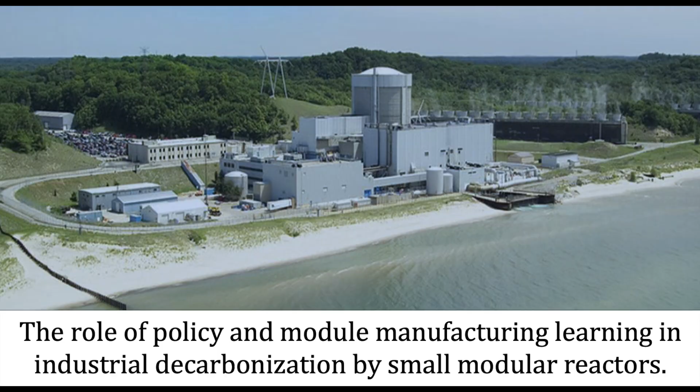You all see the news stories, you all see the day-to-day of working at a power plant or working with, or knowing people who have worked here. So I'm going to try to give the overarching content around the nuclear industry and the history of it and the possible future of it, so that as you are all reading those news stories, you can contextualize it in that way.

I would also say the inner workings of this particular power plant are not the topic of my thesis. The topic of my work has been about how power plants like this operate within the larger energy system. And that is something that we all need to think about. And by energy system, I don't just mean the electrons flowing through wires. This is about how it works with economies, it works with the communities around them, and the technologies that are operating within them.

So with that in mind, I will today talk about the history of nuclear power, how these power plants work, generally speaking. This will not be like a college lecture where I'm telling you about reactions and neutrons and all that fun stuff. The two topics which come up every time I say nuclear to anybody, disasters and waste. We're going to talk about why are we still interested in nuclear energy, small modular reactors as a key piece of that, and then briefly Palisades.

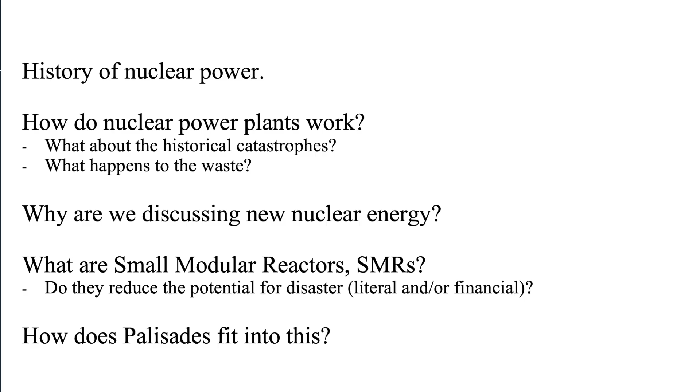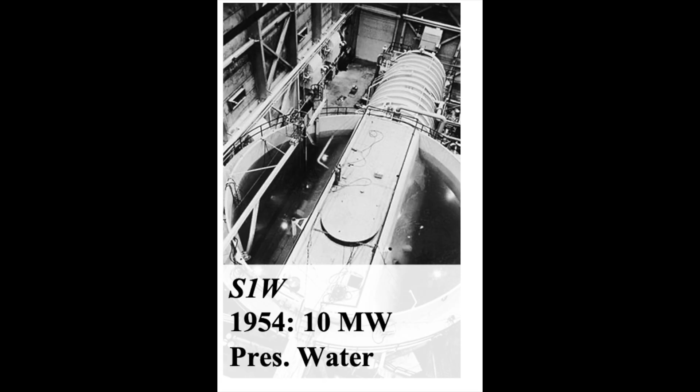So jumping right into it, we'll go to the 1940s, where we had our first nuclear reaction that took place, driven by human power. It was less than a watt of energy it produced. Just a few years later, they powered some light bulbs with nuclear energy. This was about a kilowatt of electricity for primarily military purposes. And then a few years past that, in 1954, the first nuclear power plant provided electricity to an energy grid. This was in the USSR, and it was all the way up to 10 megawatts.

We then started powering our submarines with this. So the S1W was the first pressurized water reactor that really started being used in the processes that we think about today. This was a project piloted by Admiral Rickover. I might mention him a few times throughout the day today. And a few years later, as part of a government-driven process with Admiral Rickover at the lead, we had Shippingport Power Station that was generating electricity in the United States to the grid for electricity purposes.

In 1961 was the first time a non-governmental power plant was connected to the grid. This is Yankee Rowe in Massachusetts. It operated for many years and eventually shut down, having lived past its expected lifetime, actually. It was all the way up to 186 megawatts. And then finally we get to 1971 when Palisades was started for the first time at 800 megawatts.

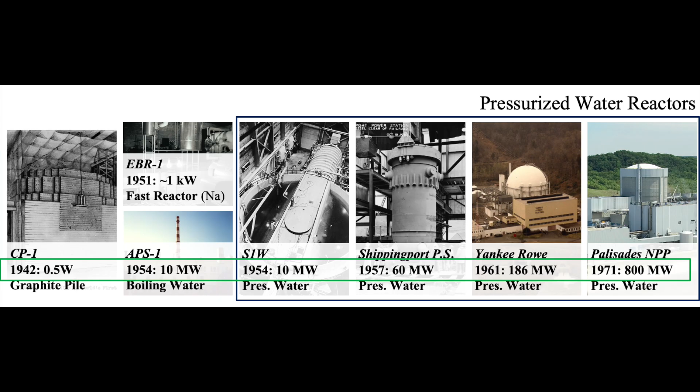This brief history here shows us two key things about the nuclear industry, which we're still dealing with today. Throughout its history, it's just gotten bigger. Nuclear power started very small, with these very small reactions as a proof of concept, and then it continued getting bigger and bigger and bigger. And that is because up until the 1970s, that made it cheaper and cheaper and cheaper. Economies of scale, the bigger you make something, generally the cheaper it gets per unit produced.

The second piece of this is that since we started using pressurized water reactors, which is a certain design type, for our submarines in the 50s, that has been the dominant type of nuclear power plant. Over 80% of nuclear power plants in the US and globally use that design. It has not diverged significantly. That's not to say other places and other methods have not gone in different directions.

For example, in Canada, they have the CANDU reactors. These use a different type of fuel, different type of coolant. We have the UK. They were using the Magnox reactors. You'll notice some of these names are really fun too. This used natural uranium as the fuel and gas as the coolant instead of water. Much higher temperatures are available for that. In the USSR, there was the RBMK, which was a different type of reactor using enriched uranium now, boiling water as the coolant. This will come up in a big way later when we talk about disasters.

And then we have fast breeder reactors. This was another technology that's used around the world, but in much smaller scales. This will also come up later. In fact, all of these technologies that were used in very small amounts throughout the rest of the world because they weren't on the pressurized water reactor train like we were, are starting to be technologies that we're looking at again. So this history tells one key story, but it also shows us that there are other avenues we can start to go in the coming decades.

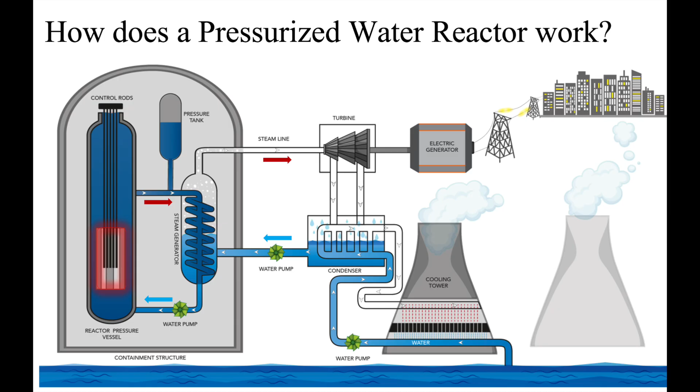Then we get into the second step. We've generated hot water. The hot water has made steam inside that funny pasta-looking shape thing, the heat exchanger, and that is a secondary loop. It generates hot steam. Steam goes, turns a turbine, the same way that a coal power plant does, a natural gas combined cycle power plant. This is a fundamental system in the energy world that many of the systems use. The steam goes down, cools off, goes back in. Closed loop. And then you've got all the other balance of system, like the consumers, and those wonderfully fancy cooling towers that aren't actually at the Palisades plant, but everyone likes to associate with nuclear.

Everybody engineers now? We're all ready to go. Okay.

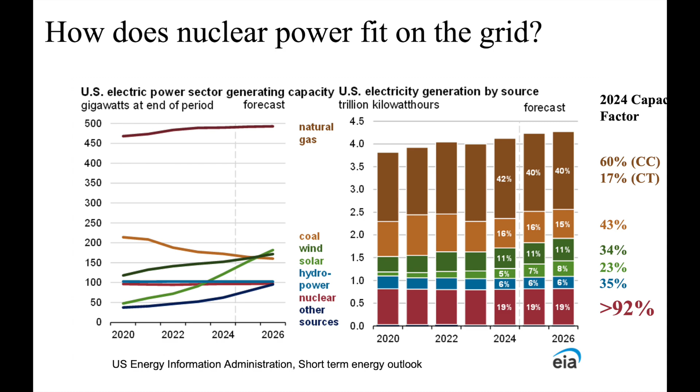What is nuclear power doing for our grid right now? We haven't built much nuclear in the last few decades. That being said, nuclear power provides 19% of electricity generated today in the entire country. Almost equal amounts to all other low or no carbon electricity sources combined. Additionally, why this is so important is because when we think about how much a resource is being used versus how much it can be used, so capacity factor is a term we use a lot. Essentially, how much is it being used versus its total potential? Nuclear is over 90% in its capacity factor. These power plants turn on, stay at almost full utilization as long as they can. Oftentimes they have to turn off to refuel, and that's about it.

This is very valuable because when we think about the power system, it's not just about generating as much as you possibly want. We generate the exact amount that we use in any given moment. That means that something like nuclear energy is able to provide what people call baseload. It's generating a constant amount all day, every day, so that other sources can vary to meet whatever we need moment to moment. This is a fundamental way in which we organize the power system, and is also one of the reasons why nuclear power fits really nicely on our power system because we need a diversity of resources on there. There's no one resource that will be key to solving everything. It has to be a lot of these things together. And there's very little that runs like a nuclear power plant at such high capacity factors to provide that all year round.

It's not perfect. It does face significant challenges. So I'm going to talk about 4 challenges in particular today. Each of these could be a few days of me just talking at you, so I apologize, I'm going to go through them very quickly. Public image, waste, cost, and licensing.

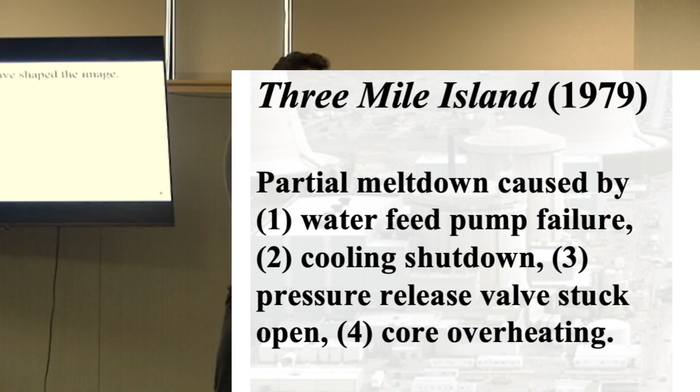Heat wasn't being taken away from the containment structure, the primary loop. So that water that's being used to cool the reactor started getting really hot. If you don't remove the heat, it has to go somewhere. It gets the water hotter, hotter, hotter. So it builds up a lot of pressure. The system worked correctly in releasing pressure from that system within the containment structure. It did not work correctly in closing the valve again, but the computer thought that the valve was closed.

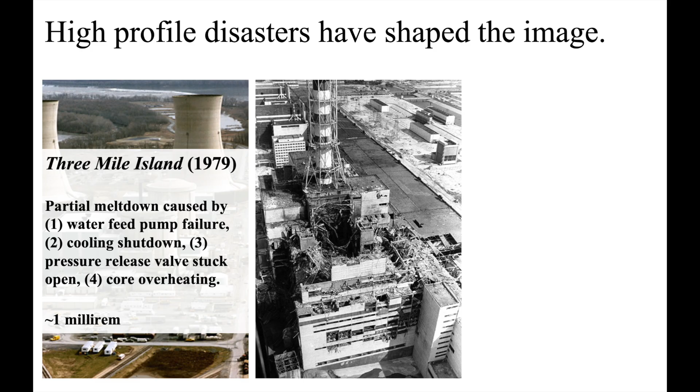The engineers found that there was still a problem, filled it back up with water because most of the water had evaporated off, causing a partial meltdown of the core, and then a small amount of that gas got released. For the 2 million people surrounding this power plant, there was about 1 millirem of radiation exposure. To put this in context, every single year, all of us are experiencing 200 to 600 millirem by just living on this planet. If you live in a higher altitude, so I'm from Colorado, I experience about 100 millirem more depending on where I live in Colorado.

These numbers are not super dangerous in terms of what they were exposed to. This was more of a policy and aftermath image issue. The systems primarily worked correctly to shut it down before there was a larger incident. Now let's talk about a larger incident.

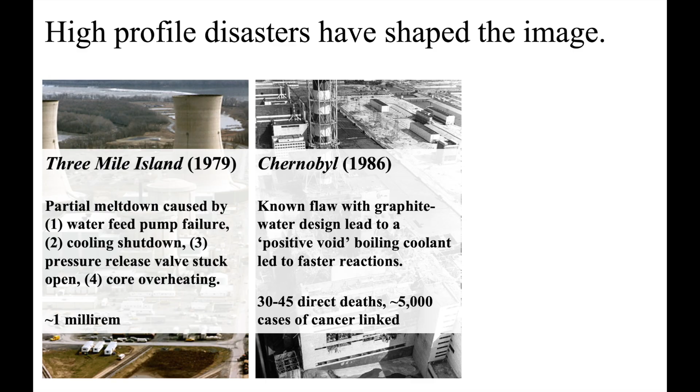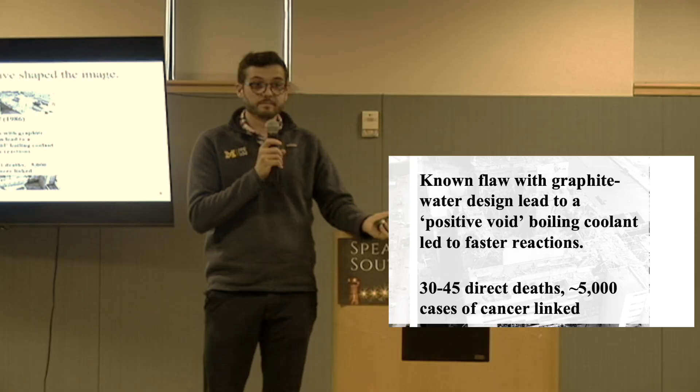In 1986, Chernobyl. I mentioned the RBMK before. This is a boiling water reactor, but it had a problem. And the biggest problem was not the reactor design, but that the reactor design had a known flaw that was not communicated to the operators or most of the engineers. So they were operating under the assumption that this is a perfectly safe power plant. And they were not told about some key design flaws in the system that were known at the time.

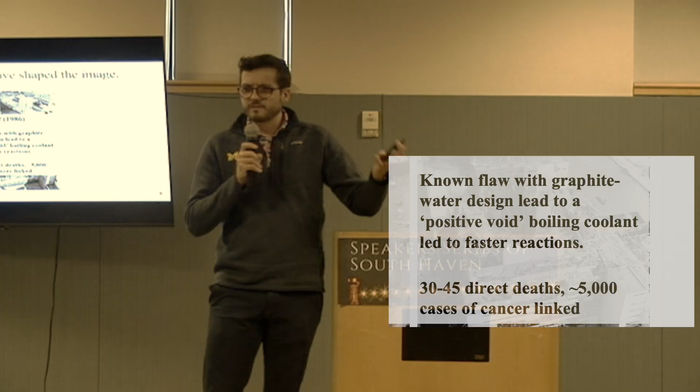This is what was called a positive void coefficient. Essentially, water is what was used to cool the system and also to make sure the reactions didn't run away. But it was a boiling water reactor, and so it generated steam. If you get too hot, you generate more steam. If you have more steam, you have less water. If you have less water, you get more heat. More steam, more heat, more steam. Cascaded in less than 2 seconds, I believe. I might be wrong on that number. Very, very fast, the whole system went critical, and there was a massive explosion from a known design flaw.

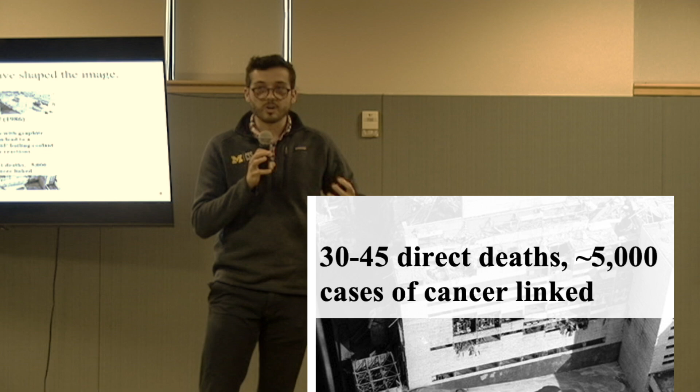30 to 45 direct deaths were associated with this, 5,000 or more cases of cancer, an area that is still under significant observation, we'll say. There are areas that you shouldn't go to in there. I would also say these numbers, I wouldn't trust them as much because of the opacity of the policy at the time.

And then most recently, I heard Japan whispered somewhere out there. Yes, Fukushima Daiichi was the most recent example of a large-scale incident. In 2011, there was a series of earthquakes and then a tsunami following. All of the power plants in the area shut down correctly.

What they didn't do was 10 years before, when they found out that there was a chance of this size of tsunami, they didn't increase the wall size around the power plant. And they kept the generators and backup batteries below sea level. Yeah, I heard some groans, I agree.

So what happened was the tsunami wave flooded the backup generators and the batteries. Cooling systems failed. You build up the pressure, can't get the heat away fast enough. Eventually, gases with more pressure there, as well as hydrogen due to some internal reactions, built up. There was an explosion.

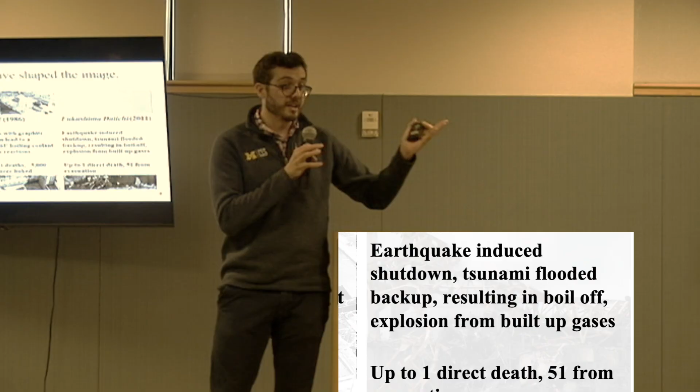There is up to 1 direct death associated with this, and there are more from the evacuation process. These numbers, again, are very challenging because this was a national scale disaster, not because of the power plant, but because of the earthquake and tsunami. So it's really hard to understand what numbers are from what.

These are all very serious accidents that are oftentimes talked about in terms of nuclear energy. But I also want to point out that at Three Mile Island, there was operation there until just a few years ago, power plant workers on site, and they're talking about restarting it. So the risk associated with being on that site still is very low, even with how large the overarching effect was.

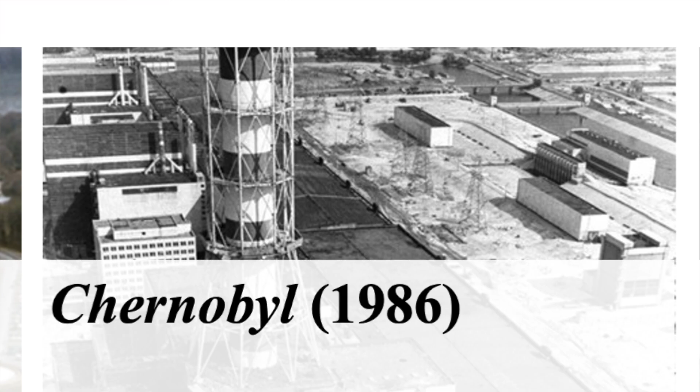Chernobyl, more significant. But there's still workers on site every single day. They have to go through strict procedures, but there still is working on that power plant. Until 2000, I believe, their power plant was actually active still at its other units.

So these are serious accidents, but there's still potential in these areas. It's not the end of the world in these locations even, particularly Three Mile Island. The other 2 are far more serious, and I don't want to minimize how serious that fallout was.

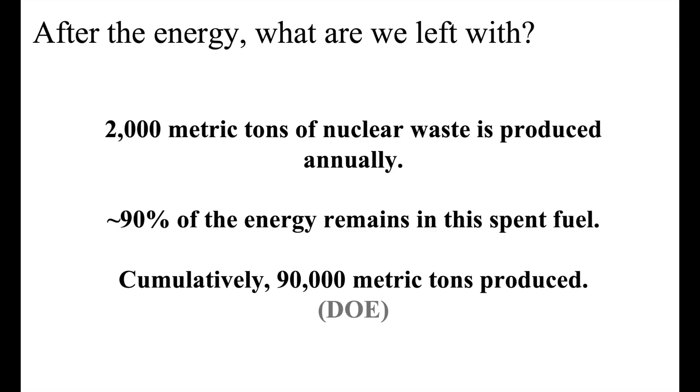Waste. Okay, we're getting the 2 hard ones out of the way first. These are really heavy hitters. So 2,000 tons of nuclear waste is generated every year in the United States. 90% of the energy remains in that fuel after it's used. There are 3 methods I'll talk about for dealing with waste. The first is what currently happens in the United States.

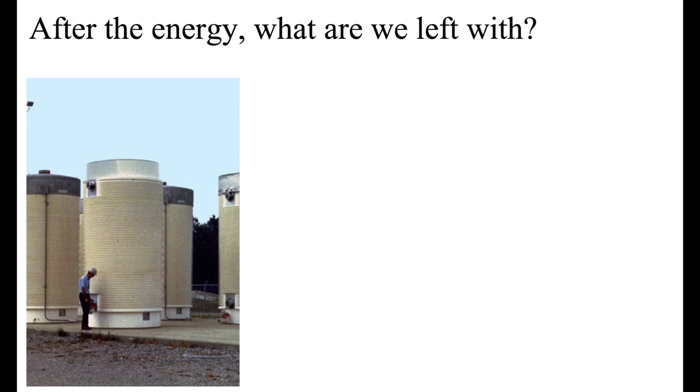The nuclear waste is safely stored in these concrete and metal casks on site. In this case, in the picture, above ground. In other cases, it's stored in retention ponds. The safety risks associated with this are fairly low, as long as someone doesn't go around trying to break into them and damage them. But they're all waiting for a permanent location. This was always a temporary thing.

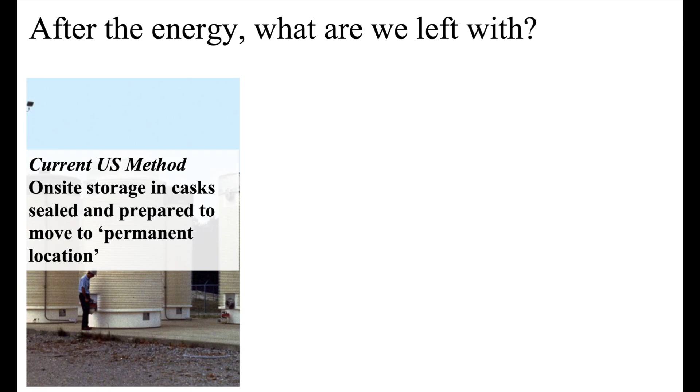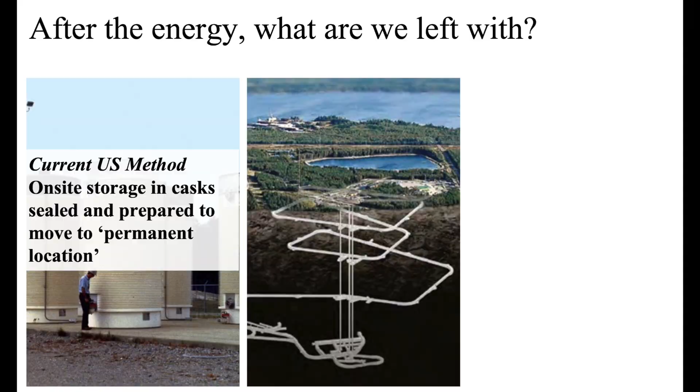The permanent location was previously decided a long time ago to be Yucca Mountain in the United States. I won't get into the politics or the decision-making behind that or why it wasn't chosen, but it wasn't chosen by the folks around Yucca Mountain, I'll say that. So that was a deep geologic repository.

You essentially are storing the nuclear waste deep underground. There is virtually no risk to those above ground, to the ecosystems, water systems. It is a very proven system, especially when it's already within these casks. In some cases, nations, for example, like the US with Yucca Mountain, have decided this is where it's going to go. Other nations, and what the US is hoping to do in the future, use a participatory structure.

Sweden, for example, put out a bidding process to all their communities, saying, who wants to host this? Who wants the nuclear waste for our entire country? Oh, by the way, what comes with it is low risk, but jobs for 100,000 years. Probably not jobs that long. Infrastructure. You get better road systems, better electricity provision, and you get a lot of money for your community. Who wants that? And there was a bidding process. So it was a participatory structure rather than top-down.

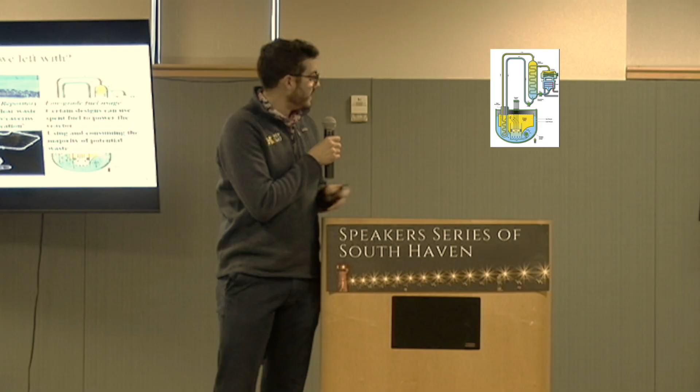The final method I'll talk about is dealing with that 90% of energy that remains in the fuel, that remains in the waste. What if we were able to reduce that? What if we didn't have as much waste? So there are different reactor designs that are able to use this low-grade fuel.

In fact, one of the reactors I'll talk about later on, which is furthest along in the process, going through licensing right now, does this exact thing. It's able to use the waste fuel of other nuclear power plants and reduce it down to 1/10 of what it was before.

Pretty good deal. It seems like economically speaking, if you're using a waste product, seems pretty good. If you're reducing waste, that seems pretty good also. All of these are different methods. I'm sure that there will be different uses and different balances of this in the future. But it is still an active challenge that's being worked on.

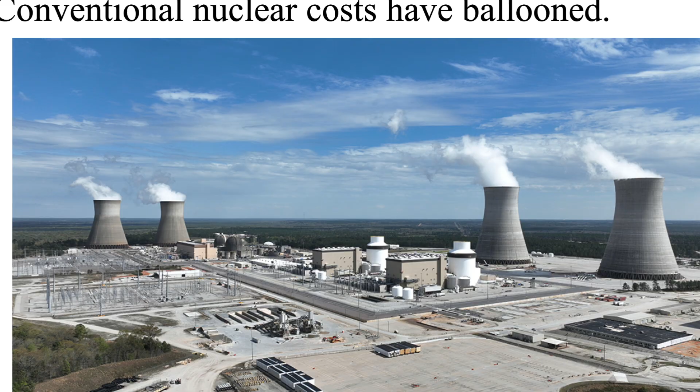Okay, less challenging topic, cost. Nuclear costs have arguably been the biggest thing that has stopped them from continuing in the United States in particular. This power plant right here is, I would argue, a poster child of some of the challenges that have been faced. This is the Vogtle power plant in Georgia. It was 7 years over timeline and over double the budget when it was finally built.

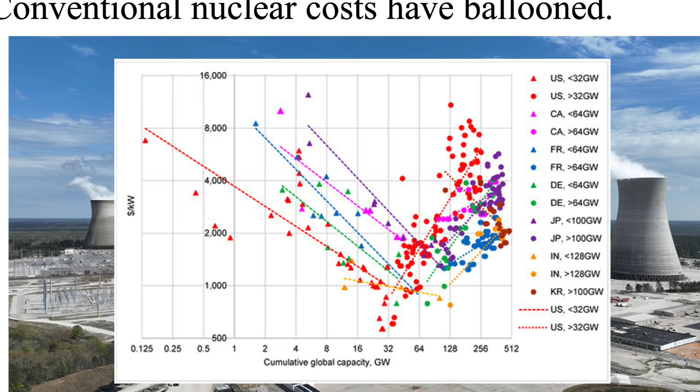This fits a larger trend. I apologize, this is a very small figure. X-axis is how much has been built, y-axis is cost. For a long time, as we said, we were building bigger and bigger, and so it got cheaper and cheaper. And then it stopped getting cheaper. Once we got to a certain size, everything got much more expensive. And every single power plant built after that was more and more expensive.

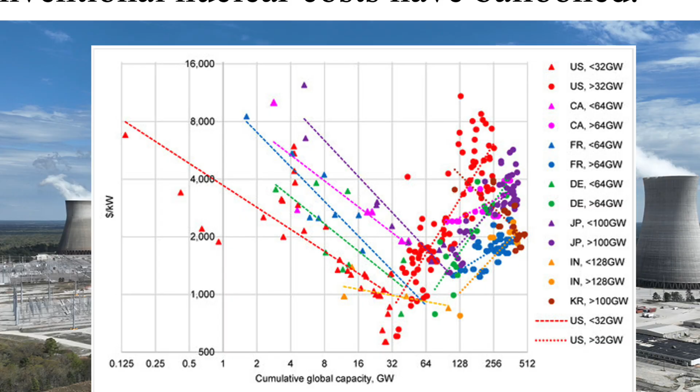Part of this has to do with the fact that almost every single nuclear power plant is a unique design. And so every single site, you have to completely redesign the system. One power plant, they actually built backwards for the first few years. Don't ask me how that happened. But it also does fit something that Admiral Rickover said at the very beginning. Every nuclear power plant gets built ahead of schedule and under budget until it's built. This is one of the biggest challenges we need to deal with.

It's called Part 50. And then very recently, in the 80s, they built a new licensing process called Part 52, where they just kind of smushed this all together. So now you just need to go through one process. Only 2% of power plants have actually used that. It's being used right now by one of the advanced reactors.

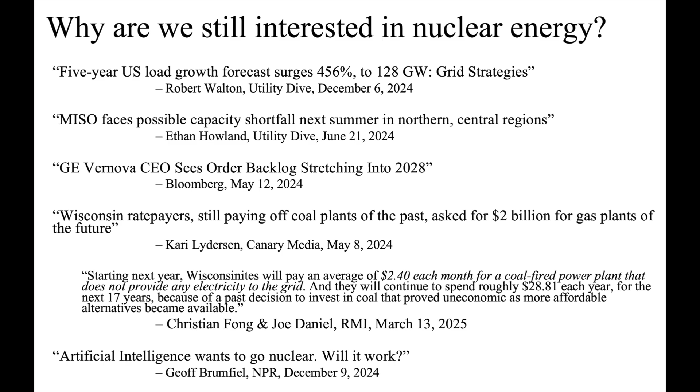Okay, that was lots of challenges. Why are we interested in nuclear if there's all these challenges? The load within the United States is expected to grow almost fivefold over the next 5 years. I said that wrong. The load growth is fivefold growth. It's not going to be 5 times the load. This means within our market region here, our market of MISO, which is where Michigan sits, they're expecting capacity shortfalls. You're not able to have enough capacity on the grid to serve demand at key peak times over the next few summers.

So let's build more. But then we have companies like GE Vernova, which supplies a lot of the turbines for gas plants. Everyone's talking about building gas plants right now. They're seeing backlogs. You can't even start to order a new turbine before 2028. Seems kind of challenging. Siemens, same thing. These turbine companies are overwhelmed. We can't build enough of these things fast enough for what some of these companies want.

At the same time, we're saying, in many cases, that we want to just build lots of gas. That's what lots of companies want to do. They want to do all natural gas. In the past, they said this with coal. But there are cases where, for example, Wisconsin ratepayers bought a coal plant. It got retired early because it wasn't economical to run. And so it became what's called a stranded asset. Every single month, consumers are paying $2.40 to pay off a plant that is no longer operating.

Those same ratepayers are being asked to pay $2 billion for gas plants. How can we guarantee that there isn't a stranded asset there? I would argue this comes down to building a diverse grid. We need resources from everything. The more we have all these different resources together, the more you're going to be able to avoid some of these stranded asset costs. If everybody builds natural gas plants, what if the cost goes up? How do we weather this system? And it's through diversity of resources.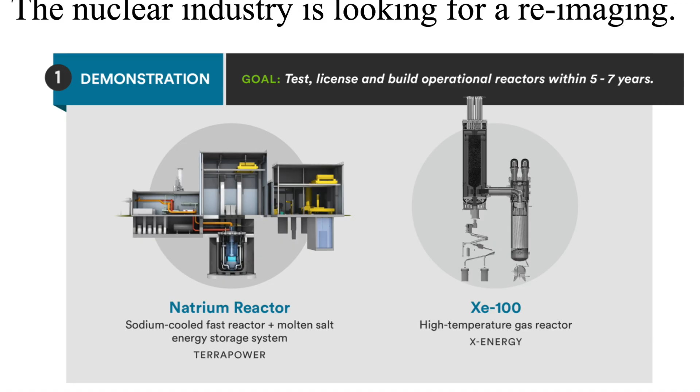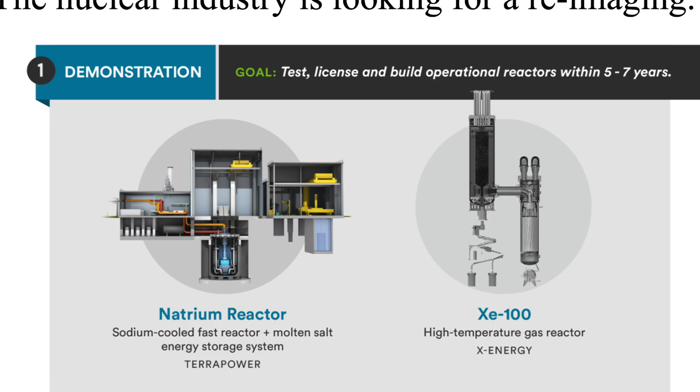One is the Natrium reactor. This is one of those reactors that actually uses potential waste fuel from others. So it's a sodium fast reactor. Instead of water, it uses liquid sodium. So it's a very different process, but the concept remains the same. You heat up a coolant, in this case liquid sodium, and generate electricity from the heat.

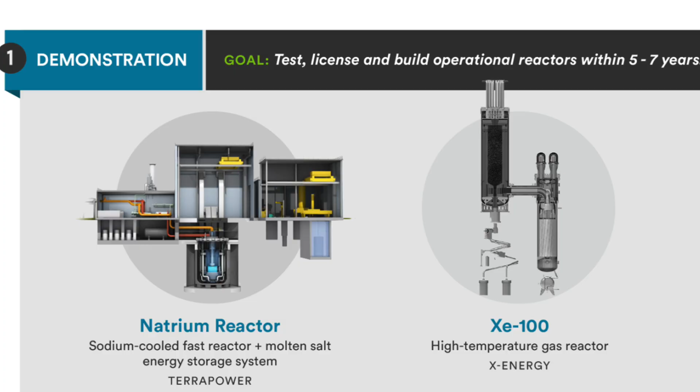Then you have the XE-100 from X-energy. For those of you following in the news, this is the reactor design that is being applied in Texas at Dow. Dow Chemical has said, we're going to use nuclear to power our systems, and we're going to invest in X-energy. They're going to do it for us. This is a gas-cooled reactor, similar to the Magnox one in the UK, and it's high-temperature gas. It's able to produce higher temperatures. In theory, higher efficiencies come with that. So it's also the first small modular reactor that we'll see in this presentation.

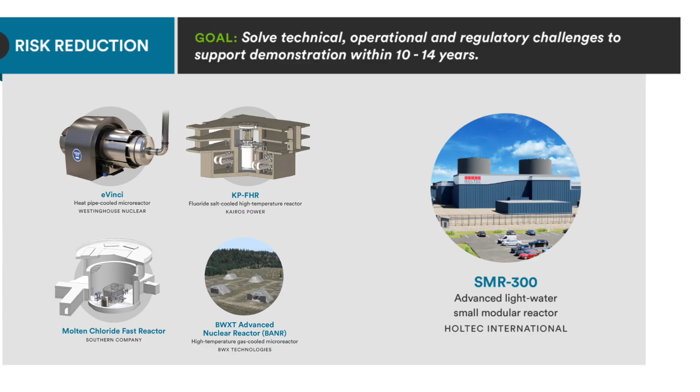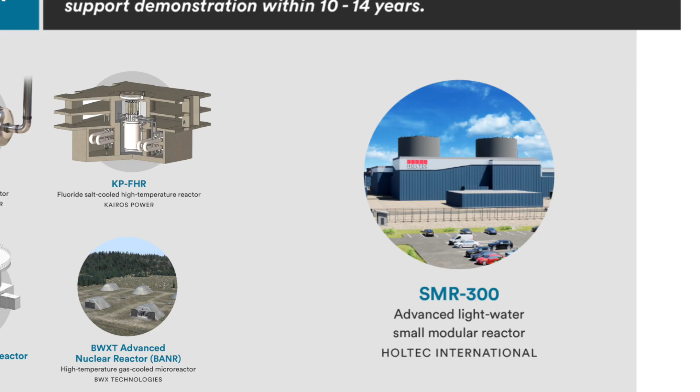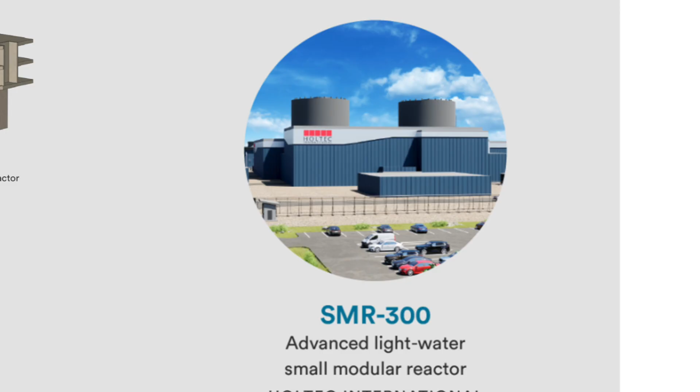There's another small modular reactor that we have to think about, especially here. The SMR-300 by Holtec. This falls into the DOE's risk reduction 10 to 14 year time bracket. This is an advanced light water reactor. So imagine a miniaturized pressurized water reactor. How does that work though? How are we miniaturizing all this? And what does that actually mean for the system? So we go back to our fancy diagram, how we're generating electricity.

And we replace that whole containment structure. Now we have a simplified, enclosed system that can be built in a factory and shipped on site. The primary components of it are much smaller, in theory being able to be transported. There is this rounded surface in there that is an enclosed pressure vessel. That is where the entire primary loop takes place.

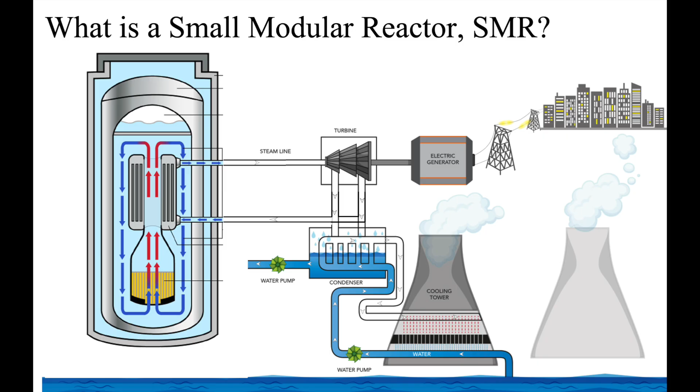I don't know if it's visible throughout the entire thing, but there are no pumps anymore. Or at least there's reduced emphasis on an outside pump. Two of the three disasters that we saw before, it was a pump failure. You also are now containing it in water and a secondary containment structure. And you can get rid of lots of the extra balance of system. There still is more in there. I promise it's not this simple, but for all of our purposes today, it's reduced complexity in this manner.

They are designed to be inherently safer. That is one of the key value propositions. They're more expensive, which I'll touch on in a second, but they're designed to be safer. As we said, the #1 image of nuclear energy has been shaped by disasters. This was really critical for SMR designs from the very beginning. They're designed to have passive safety measures. So that comes with simplicity. It's a contained vessel that has gravity or heat-driven coolant. If the power goes out, gravity typically still works.

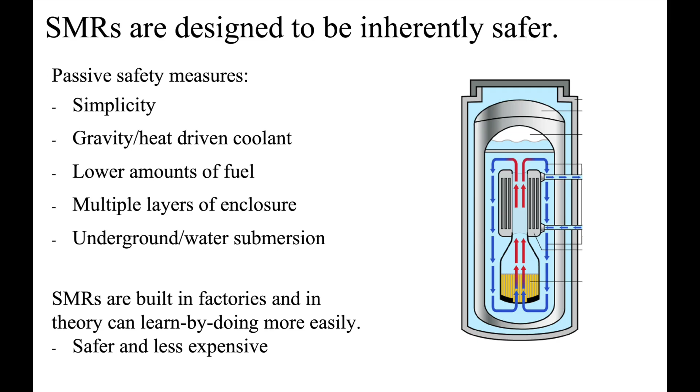They also have lower amounts of fuel. So you're not going to have the same energy density to be able to run forward if you have a failure of a system into a large-scale cataclysmic event. There's multiple layers of enclosure, which are sometimes designed and built in a factory so you can test every single aspect of it before you send it to the site. You don't have to worry about on-site construction errors as part of that initial pressure vessel and enclosure system. And further, you're putting them underground and underwater mostly. So they're not only contained by a pressure vessel, but now by water, and then by a hole in the ground. So there's much more containment.

One of the other aspects to these is that you're able to build them in factories mostly. That means that they're not all unique. They're not all going to be more expensive than the previous one, and you can learn by doing. Whether it's airplanes, cars, TVs, things get cheaper the more you build them, typically. That's because they don't reinvent the TV every single new TV that comes off the line. The same principle goes for why they're trying to do this with small modular reactors.

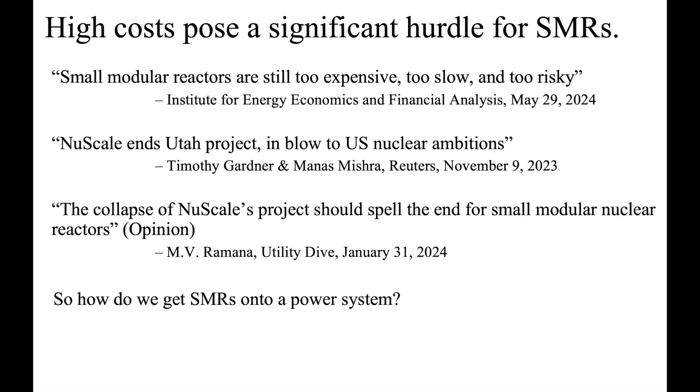Let's see. They're expensive. Again, they have not been built yet, so they're going to come in over budget. But they're very expensive even under budget. Some argue they're always going to be too expensive. There's too much risk. Can't do anything about this. Utah had an agreement with NuScale Energy, a small modular reactor company, to build these and install them in Utah. And it fell through. The costs escalated too far.

So obviously that was the end of small modular reactors. We're not going to talk about them anymore, except that they're still going to be built in Dow Chemical or at Palisades. So it's obviously not the end, but we need to think about how do we actually get these onto a power system? If we can't rely on projects all working, we can't rely on the first one being built to drive the costs lower, what do we do?

So now I'll do a little plug for my actual research. So this one slide is what I've done research on. We were looking at other uses for small modular reactors. They're not competitive necessarily on the electricity wholesale market. MISO, the area we're in, is a wholesale market. It's very complicated. Not a perfect wholesale market, but it's competitive. So we looked at industrial heat. Could that be a valuable market for SMRs before electricity? These produce between 300 and 600 degrees Celsius steam. That's pretty useful, past just electricity.

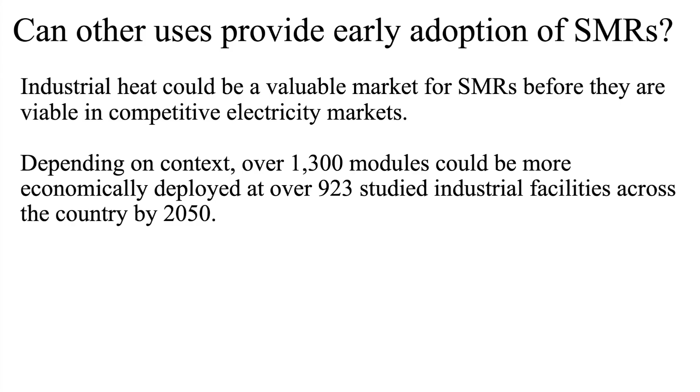Depending on the context, across the entire country, 923 actual facilities that we had data for, we could deploy by 2050 1,300 modules, given different contexts. A lot of these were smaller reactor designs, like microreactors, which are a smaller version of small modular reactors.

And I will say, just to make sure everyone knows, small modular reactors sounds like it's gonna fit in the back of your car. It's not. These are much larger than you'd expect from a word like small. I think some of them would probably be about the length of this room as just the reactor pressure vessel. Much smaller than a typical nuclear power plant. But I just want to make that known before we go further. Small is a bit of a funny word for it.

Some of you are energy people who read the energy market news all the time and see $2 to $4. And so you might be saying, that's ridiculous. This is industrial delivered natural gas. The $2 and $4 is market price. It's at the trading level, and sometimes even at power plants, but not at industrial facilities. For example, in 2023 Michigan, the annual average was over $9 per MMBTU, which means that it was cheaper to install this new technology, small modular reactors, rather than just continue paying for natural gas.

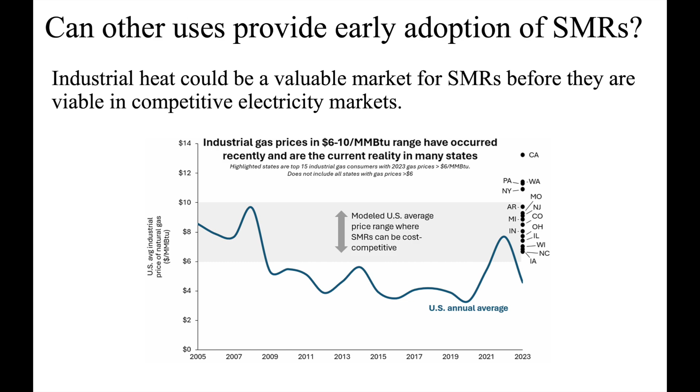So there is an opportunity to start building these in certain markets, starting soon. It's economically viable if the costs don't increase. And that could spur the learning, the development, and the greater opportunity for them later on.

I think I'm slightly over time.

I apologize. What does this mean for Palisades? As I said, I'm not going to try to tell you exactly how Palisades works. I am sure some of you in the room could tell me far better how Palisades works. Well, we can start off. There's already demand. You can think about this regionally with the market that I said was seeing capacity shortfalls. It's great to add more capacity onto the grid. But there's already demand where people are trying to reserve the energy from Palisades running in the next few decades for their co-ops in Michigan.

There's commercial and industrial interest. Holtec wants to build this and build their small modular reactors on the site. This is a huge step. There is market and there's opportunity here. There's also lots of challenges. This has never been done, particularly the restart of an old reactor. It's never been done. It's being discussed in multiple locations, but Michigan would be the hub of a very important change in the nuclear industry to be able to be this point where something large shifts.

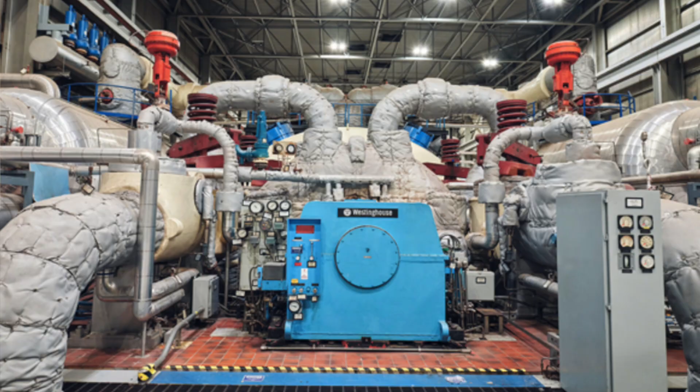But there's lots of questions. Are there health impacts? People aren't sure. People haven't understood this. People are asking the questions, which are very important questions to ask. Is this power plant ready to restart? One of the reports found that of the 16,000 steam tubes, I think was the number I read, over 1,000 of them had corrosion. There's a discussion about how that's a very standard practice. You plug and you re-sleeve these steam tubes. In different reports from the NRC, they say, well, this is a new material you're using for this process. We need to evaluate it further. So there's lots of questions around that.

And there's a lot of questions around the timeline. Getting a nuclear power plant started by the end of this year, that's a tight schedule. The NRC has not been known to move fast. Nuclear in general doesn't move fast. And so it's a very demanding timeline. The second aspect is there's discussion of having these small modular reactors installed by 2030. Those are in the 10 to 14 year time bracket. How does that work? There are lots of open questions.

So the purpose of all this, I hope, has been useful in just contextualizing everything that you're reading these days. I would love to get into individual questions about what you are seeing, what you would like to know more about, because there's a lot of unknowns in this.

Okay, so Max, when you think of where we were in nuclear energy now, what keeps you up at night?

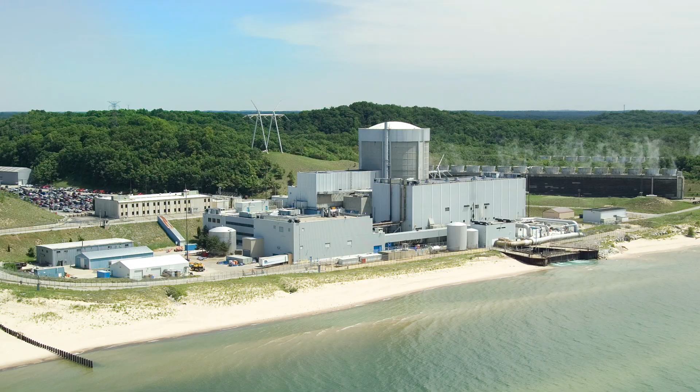What keeps me up when it comes to nuclear? I think that nuclear itself isn't what keeps me up at night when I think about the energy system. It's about how we're able to bring together all the different aspects of the energy system. We have many of these technologies. We have many of these options available to us in the energy system. We just need to use them and implement them and connect them.

We need to connect the technology, the policy, the social systems around these. We can't just have one or two of those branches. It needs to be everything. Okay. And what keeps me up at night is thinking about how we're not doing that.

And so our energy system, which could be so robust and so flexible and dynamic to be able to handle the challenges, gets really bogged down because we argue over many specific details rather than trying to actually solve the problems. At a systems level. As a systems level. Yeah.

So here's another one. I'm just going to read these as they're written. What do you think of storing waste on a moving dune? How much water does an SMR produce? And I think there were some notes in the margin about climate change and just the unpredictability of storms, that sort of thing. So I think it's a risk question.

Yeah. So storing the waste on a moving dune doesn't necessarily seem like the best idea. I am not an official representative of anybody right now, so I want to say that first and foremost. Storing something on a moving dune seems like a challenge for making sure that it is constantly stable, constantly protected.

I think that the bigger issue is not having a permanent option right now. None of these sites were designed to be permanent waste repositories. So this is a specific issue, yes, but it is indicative of the larger, more pressing issue of us not pulling together a permanent strategy.